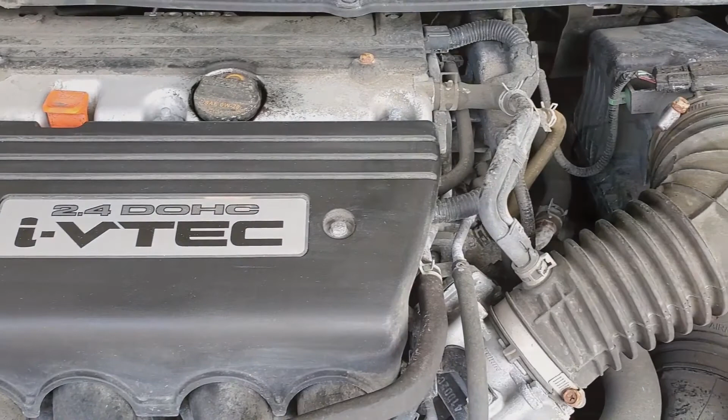Whether it's a combustion engine or an electric motor, it has its optimum efficiency and power range during operation. Knowing how to size a motor to match with your load, such as a propeller, turbine, or vehicle drivetrain, can either enhance the system's performance or its efficiency.

In this Part 1 episode of DIY Education Series, we are going to investigate how proper motor sizing and load matching can help to maximize the performance of your mechanical system.

When a system's power output is boosted up, it can handle higher load or operate more responsively. To analyze how the mechanical output of an engine or a motor is delivered to a system, we normally look at the power and torque curves.

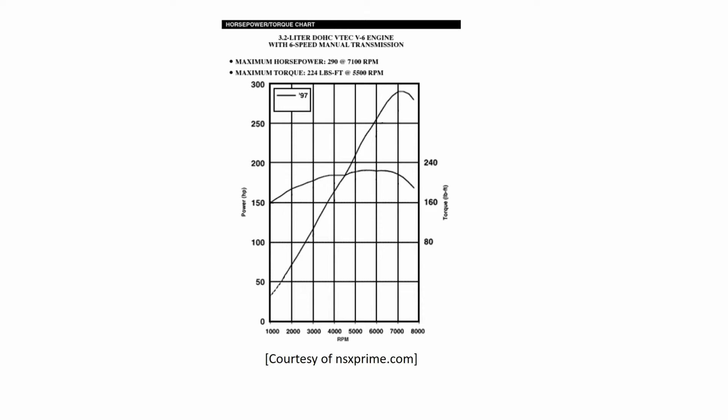Upon unloading the shaft, the motor will start to gain speed and its speed will reach the maximum, called free speed or no load speed, when there is no load added to the motor. Unlike an internal combustion engine, which can't produce torque at 0 RPM, an electric motor can generate torque initially at stop, so it can self-start by itself and doesn't need to maintain at an idle speed during standby.

Before we analyze these graphs any further, we should first understand the physical meanings of torque and horsepower. Imagine we have a wheel, and we are going to use a wrench to transform a force applied at the end of it, to create a twisting moment applied to the center of the wheel. This twisting moment is called torque.

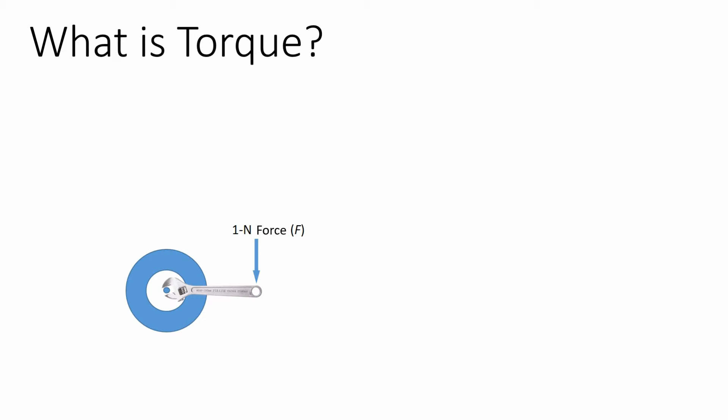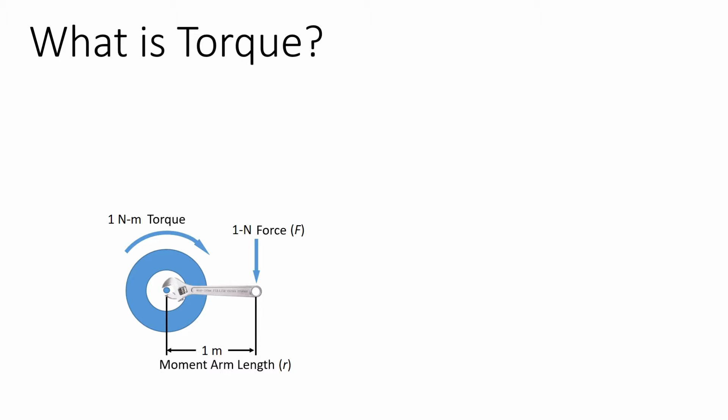If we apply a force of 1 Newton at a distance, called moment arm, 1 meter away from the center of the wheel, we will generate a torque of exactly 1 Newton meter. So torque is simply a product of the applied force and the moment arm. Well, not exactly. Strictly speaking, torque is a cross product of the applied force and the moment arm.

Imagine if the force applied to the end of the wrench is not perpendicular to it, the amount of torque will drop. The magnitude of torque is therefore related by the product of the applied force and the moment arm, multiplied by sine theta, which is the mathematical definition of a cross product.

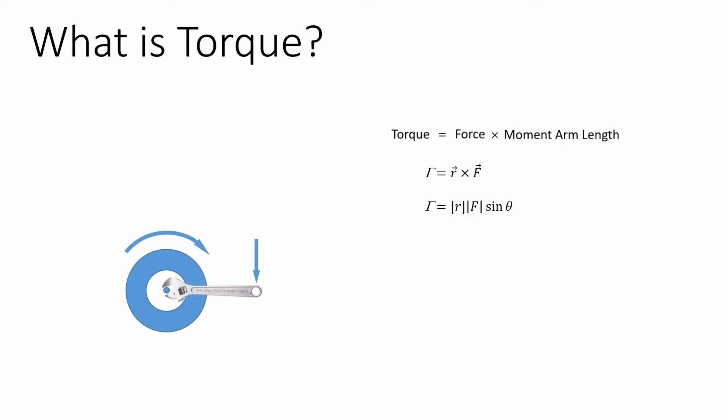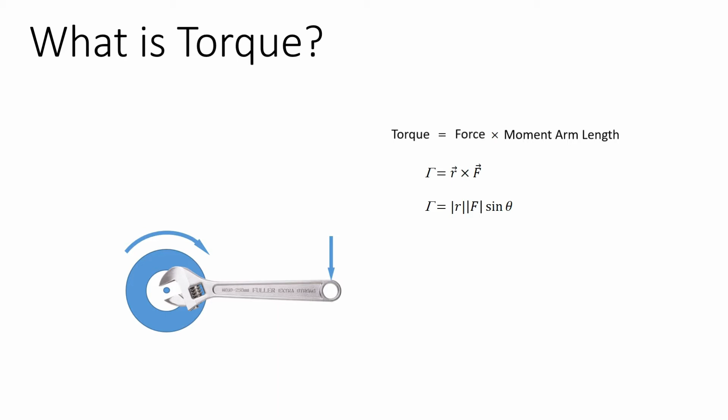To increase the amount of torque produced while keeping the force constant, the only option is to increase the length of the moment arm, called leverage. Leverage, or mechanical advantage, can be achieved by using a gearbox. A gearbox can either be used to increase the torque or the RPM of the spinning motion.

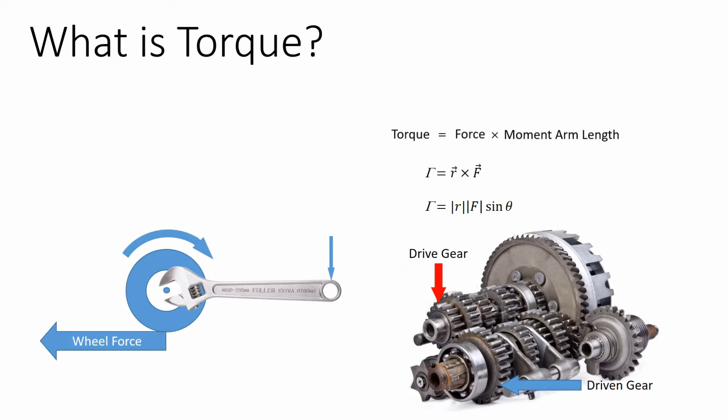For example, if we have a gearbox whose drive gear has fewer teeth than the driven gear, the torque will be leveraged but the RPM of the driven gear will drop. Vice versa, if the driven gear has fewer teeth than the drive gear, the RPM will be lifted up but the torque will drop. The produced torque eventually reaches the circumference of the wheel, which makes contact with the ground to propel itself forward.

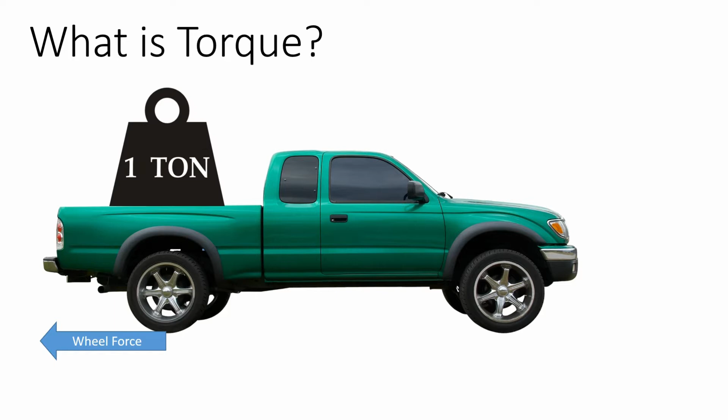Therefore, knowing the amount of torque and the RPM it produces can help us determine how heavy a load the system can handle, or how steep a slope the vehicle can climb.

Finding the required torque for a load and matching it to an engine or motor's rated torque is called torque matching, and it is the first step in motor sizing. If the required torque is higher than the rated torque, your engine or motor will be overloaded. If the required torque is much lower than the rated torque, your engine or motor will likely be oversized. Therefore, torque matching is a very important step in mechanical system design.

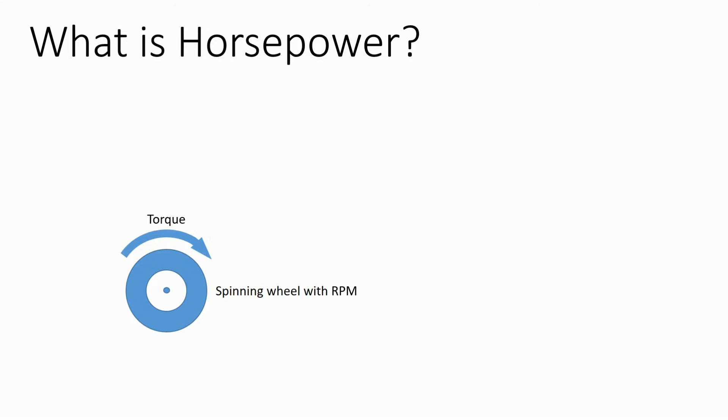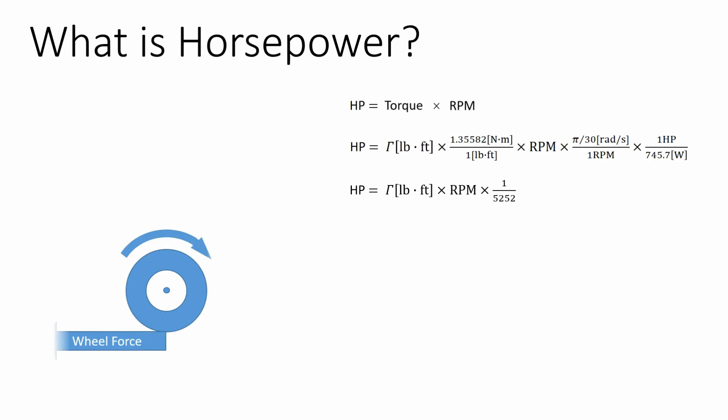Horsepower, defined as the rate of change of energy, can be expressed as the product of torque multiplied by the rotational speed, RPM. It is how fast the torque is being delivered at a certain time. So horsepower is a direct indication of how fast a system can run with a given force applied.

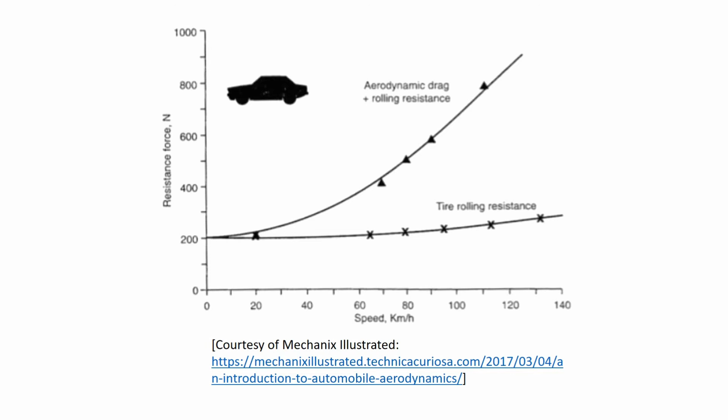Now let's shift our focus to the dotted line near the bottom of the graph. This line represents the vehicle driving resistance, largely dominated by the air resistance and the tire rolling friction. This driving resistance is the minimum retarding force the vehicle needs to overcome in order to propel itself forward at a constant speed.

And this is the force we need to figure out for calculating the required torque and torque matching. The difference between the wheel force curve and the driving resistance curve is the net force available to propel the vehicle. The wider the gap between the two, the harder the vehicle accelerates, and the higher the towing force it generates. So if we identify the peak of each wheel force curve, we can determine the maximum acceleration and towing capacity for each gear at certain vehicle speed.

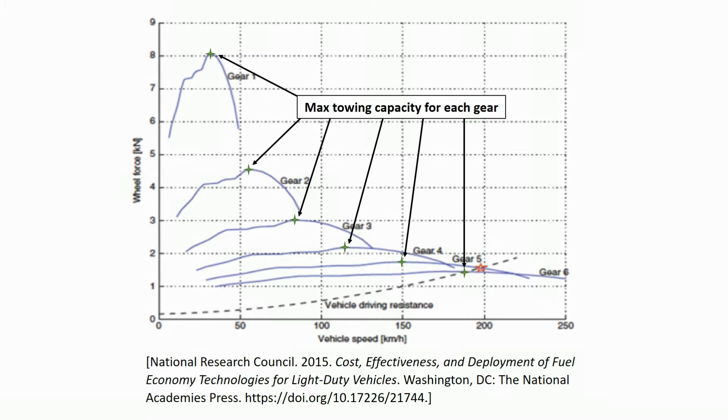However, these maxima are good only for identifying the maximum towing capacity and the speed it produces for a specific gear, but not useful for identifying the shifting point to propel the vehicle to accelerate with the highest rate to reach the top speed.

Think of this: if you stick your vehicle in the first gear, for sure you can generate the highest wheel force to accelerate. But as your engine RPM ramps up and the vehicle gains speed, due to the high reduction gear ratio, the vehicle speed will not gain much, even when your engine RPM reaches the red line.

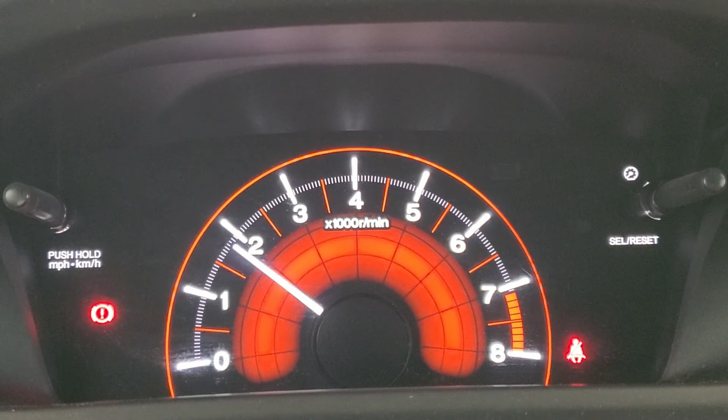In order to increase the vehicle speed further, you have to upshift to the higher gears. You may think that using the peaks of the wheel force curves to upshift may help to accelerate the vehicle at the highest rate to reach the top speed. This is not true most of the time, especially when shifting in higher gears.

So the key here is not to just focus on the peak force delivered by the current gear, but also the available force delivered by the next gear up.

The goal is to find a point to compromise the two curves. In the case of upshifting from first to second gear, it's still suitable to use the peak of the first gear curve as the shifting point, because the force drops rapidly after the peak on the first gear.

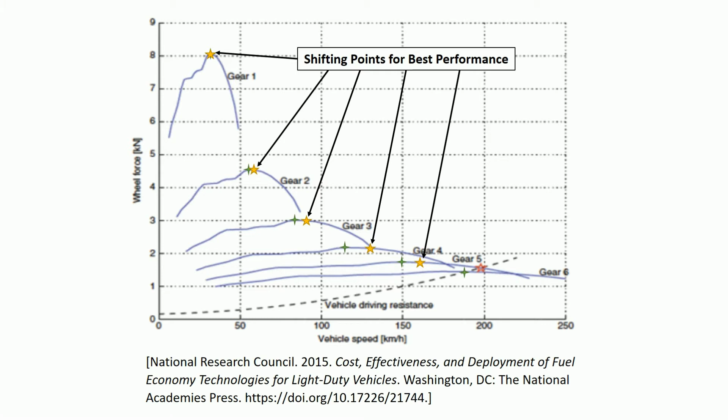If we use these shifting points to deliver the wheel force to the vehicle, it can reach the top speed in the shortest time. This is an example of how we maximize the performance of a vehicle powered by a combustion engine. One thing I want to point out specifically in this graph is the point denoted by the red star.

This is the equilibrium point where the wheel force produced with the fifth gear is equal to the vehicle driving resistance. At this vehicle speed, the net force is zero, which means the vehicle can no longer accelerate to gain higher speed. So this is the actual speed limit of the vehicle, which is just shy of 200 km per hour.

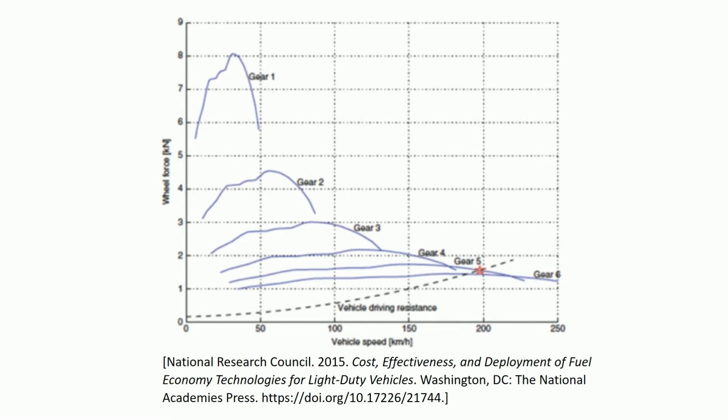If we define this as the maximum cruising speed of the vehicle, we will use the vehicle driving resistance produced at this speed to match with the torque produced by the engine engaged in this gear. This way, we know we will have just enough torque for the vehicle to operate at such cruise condition. At the same time, when we need extra torque any other time before the top speed is reached, we can simply downshift the gear to generate more torque to accelerate the vehicle. This is an example of how torque matching could be done to a vehicle powered by an internal combustion engine.

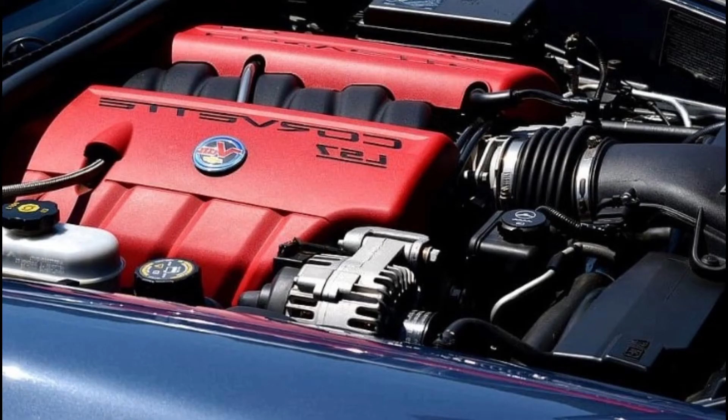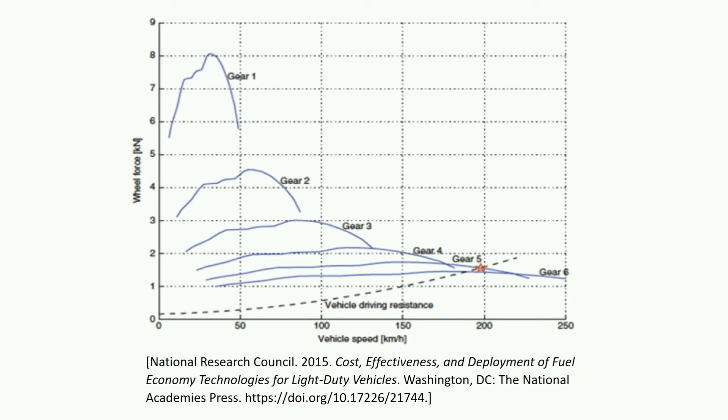If you want to know how much power is actually delivered to the vehicle at the maximum speed, you can simply multiply the wheel force by the vehicle speed, and you should get around 113 horsepower at the wheels, which is less than what the engine delivers, after the mechanical and thermal losses are taken into account.

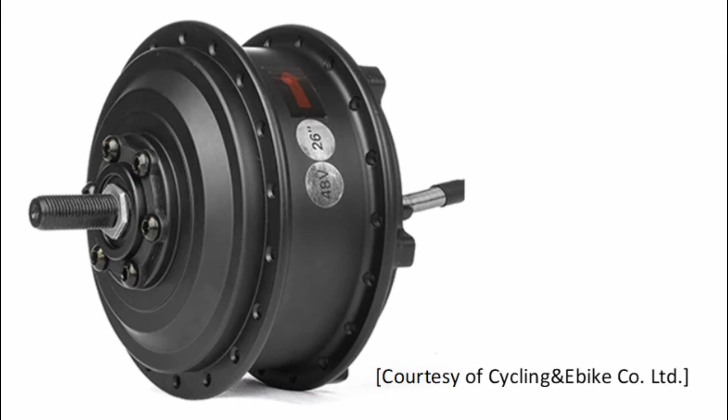While the use of multi-speed transmission is essential for internal combustion engines, it is usually not needed for electric motors. The hub motors used for e-bikes, and the induction motors used for Tesla, both don't need gearboxes. And you may ask why?

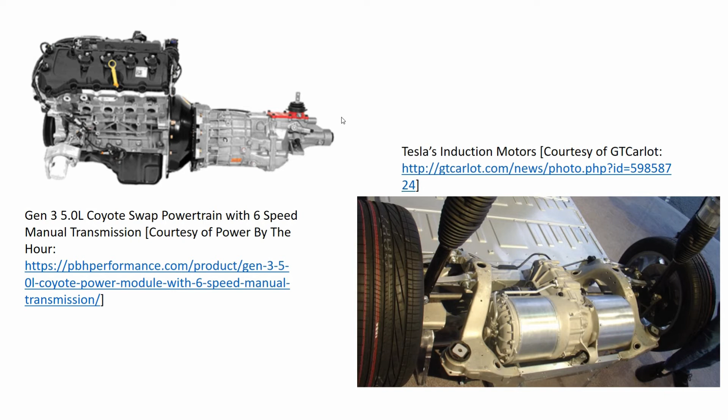Well, it lies in the fact that electric motors can deliver the maximum torque right from the get-go, but engines can't. If you compare the torque graph between the two, you will see the difference.

Internal combustion engines will stall if you apply the full load to it, before it gets to a comfortable rotational speed. That's why a clutch is needed to apply the smooth loading transition. And that's why a gearbox is also needed, to increase the torque from the get-go. Otherwise, the engine will never be able to set anything into motion from a standstill position.

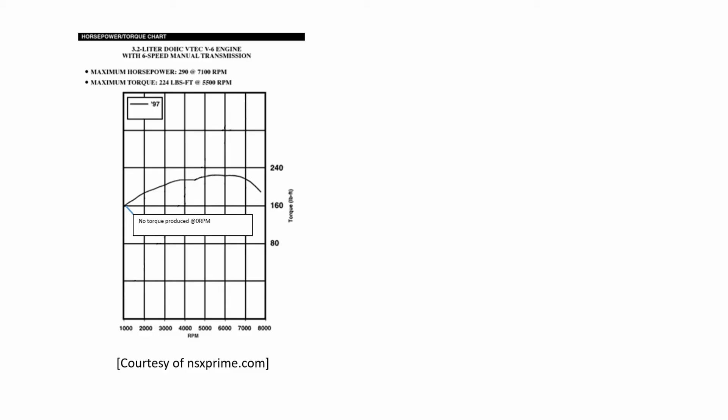In the case of the electric motor, it delivers the maximum torque right at the stall position. So if the motor already has enough torque to do its job in the first place, you don't need a clutch and a gearbox to vary the load, and lift up the torque to get the engine going from stop.

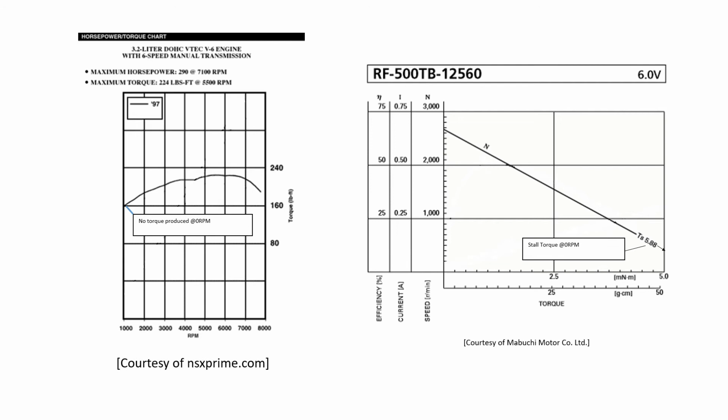This graph tells the difference between the torque delivery of electric motors and that of combustion engines, when the vehicle is set in motion. You can see the torque range of electric motors is a lot wider than the combustion engines, even without the presence of gearboxes. And combustion engines can't generate torque initially at stop.

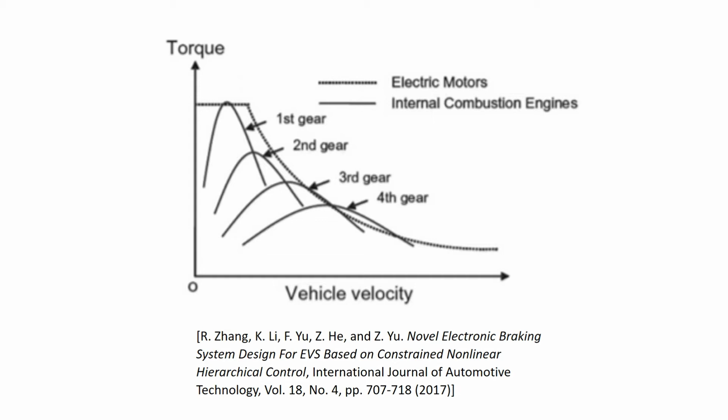To maximize the performance of a system powered by an electric motor, we will again look at its torque chart to figure out how to conduct torque matching. The motor we use in the example here is a BaneBots RS-550 brushed DC motor.

Since efficiency is defined as the ratio of output to input power, dividing the output power by the efficiency gives us the input power to the motor. Now simply divide this input power by the current consumed at 9,500 RPM. You should get an input voltage of about 12 volts.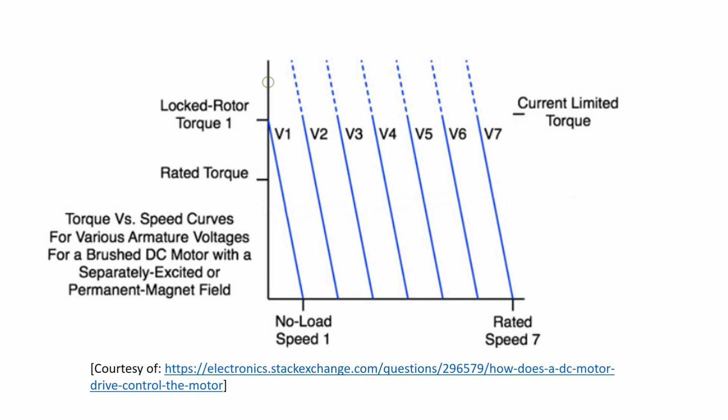I should also mention that we shouldn't run a motor at stall for a prolonged period of time, since the motor coil will get heated up and will eventually burn out. This is the leading cause of motor failure. We should always give some room to avoid running the motor at the stalled condition.

So to solve the problem of not having enough torque at the desired speed, there are two ways to deal with it: first, upsize the motor, or second, leverage it with a reduction gearbox.

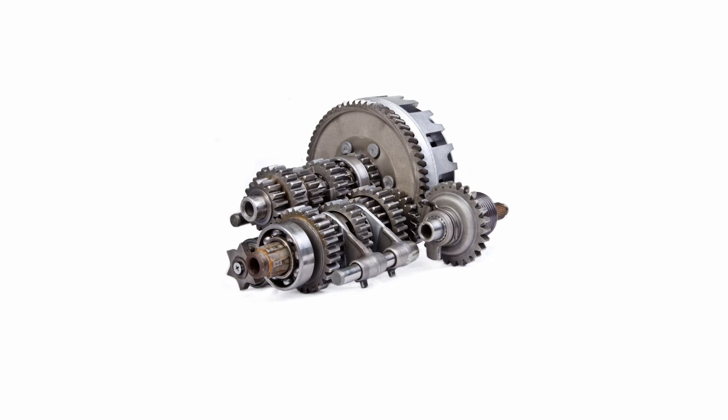Upsizing the motor seems to be an easier way to do, but if it costs more in terms of money and weight, then using a reduction gearbox may be a better option.

But in reality, since the added gearbox will add some friction loss to the system, you will also expect some reductions in the output power as well as the efficiency. So the actual RPM may not be far away from our desired one.

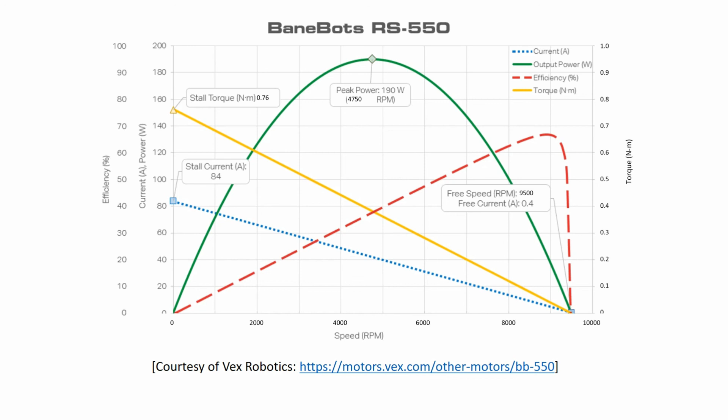Even if the actual speed is a bit too high or too low, we can adjust the input voltage to correct the speed according to this chart we saw earlier. Essentially what we are doing is moving the operating point on V7 to a new operating point on V6. In our case, the point on V6 should intersect both the torque at 0.3 Nm and the RPM at 5,000.

Note that the required torque is higher at the beginning due to static friction. Once it overcomes that, the required torque drops, but it then gains magnitude when the speed keeps increasing, until the maximum rated speed is reached at 5,750 RPM with a supply voltage of 12 volts.

And since our desired operating speed is 5,000 RPM, we drop the supply voltage to a certain value, which will be determined experimentally, until the motor spins at a constant rate of 5,000 RPM.

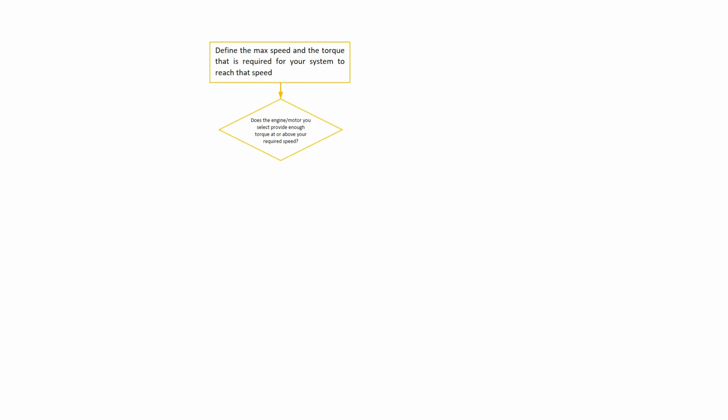The following flow chart summarizes what we have discussed in this video. It may guide you in the decision-making process when it comes to performance optimization in motor-load matching.